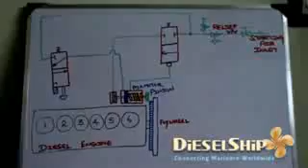So this is a simple air starting circuit for a 4-stroke engine, or either a small engine which is having air motor for starting. So let's now understand the basic simple circuit.

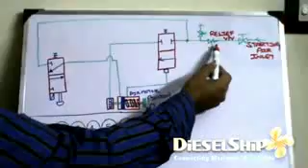Here we have the starting air inlet, usually 30 bar from the air bottle, and depending on the size of the engine we have a pressure reducing valve. This is just optional, so this valve depends on the engine size, may be there, may not be there.

For bigger engines, if you want to start with air motor, 30 bar is required. If it's a small engine, 30 bar is not required. So this pressure regulating valve may be adjusted for 20 bar, so it reduces the pressure and then gives to the starting circuit.

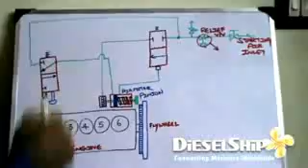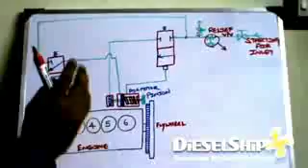And after that we have a safety mechanism, that is a relief valve, which means if something happens in this air starting circuit, the relief valve will lift and the air will be vented out to the safe area. So all this location and the purpose depends on the ship design and the starting requirement of the engine, but the basic system resembles this one.

So this is the simple diesel engine. Let's say it might have 5 units or 6 units. I assume it to be a 6-unit engine with a flywheel, and as we all know, the flywheel has the gear tooth over here. The bigger engines which we normally use on board ocean going vessel has teeth like this which engage with the turning gear and thus turn the flywheel.

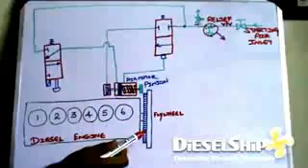Similar arrangement is there so that the air starting motor, this is the one, has a pinion which is a gear tooth, engages and then turns the engine. As it turns, the RPM, the speed of the engine, raises enough so that the combustion can take place. Till then, the air motor will rotate the flywheel with the help of compressed air.

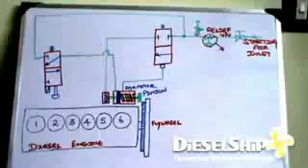So let's now understand the circuit. The 30 bar air, or the required air pressure after the reducing valve, comes over here and stops and waits at this control valve. So this is a pneumatic operated, spring loaded,

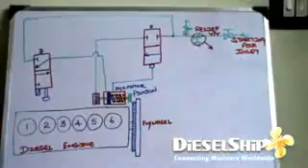2-position and 2-way control valve, and a part of air branches out and then goes to a control valve which is having 2-way starting mechanism. Either it can be a push button over here which is useful for manual start, and a remote signal can be given from the control room, thus this valve will operate.

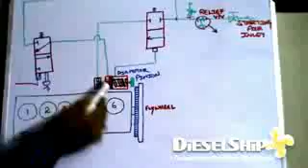So after the valve, the main line goes to the air motor which has a piston here. The piston is spring loaded, and as the air pushes the piston down, the pinion moves down and engages with the flywheel. And as the piston goes here, the air passes through.

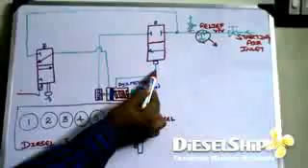This port is uncovered. This port has an access to here, and the air passes like this and then activates this pneumatic valve, the control valve. So this comes in this place, thus allowing the air, and then here are the vanes.

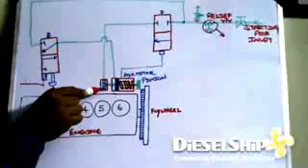This is similar to a vane or a turbine which has various flaps, and then as the air comes and hits it, it starts to turn. Thus the pinion is engaged with the help of the piston, and with the help of the vanes and air pressure, the engine is turned.

And as the engine picks up speed and starts combustion, let's say at 30 or 40 RPM depending on the engine design, let's say it fires on fuel now. A signal from the governor or from the control system, depending on the design, comes and deactivates the solenoid valve.

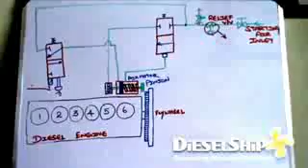Once it gets deactivated, again the valve gets shifted, the air behind the piston gets drained. So the piston, due to the spring force, retracts, thus the pinion is withdrawn from the flywheel and the air access is shut off, which means the air to the vane or the air motor is cut off in this place.

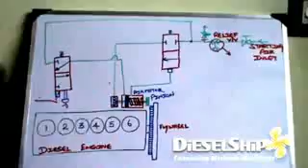Now this is the engine in let's say idle position. The engine is not started now. The other diagram which I'm going to show will be a working diagram, that will be a working circuit. Let's see how it is.

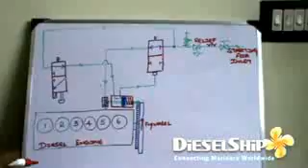So this circuit over here represents the air motor when it's working. So as I said earlier, the 30 bar air comes over here, and I start the engine manually by pressing this lever, and the 30 bar air which is available waiting over here, as the valve gets shifted, it passes through the control valve and then it passes through.

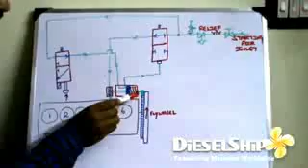Thus immediately it pushes the piston down. Thus the pinion engages with the flywheel, and as it pushes, it passes out and then operates this control valve pneumatically. So the compressed air operates this control valve.

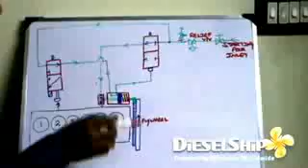Thus the main air which is waiting here, the valve shifts and then it passes through, rotates the vane and gets vented through a small hole, and as it rotates, the pinion rotates, thus the flywheel turns and then the engine picks up speed, and as the engine picks up the firing speed, I see the tachometer on the engine panel.

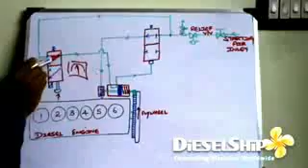As it picks up speed, I release the lever. So once I release it, immediately due to the spring force, the valve shifted and the line gets vented. This line, the air behind the piston gets vented, which means the piston due to the spring force will come back to its original position.

Thus the pinion is disengaged, and this control valve, since there is no air supply, shifts back, stopping the air, and no more air supply for the vanes. So the air motor stops working at this time.

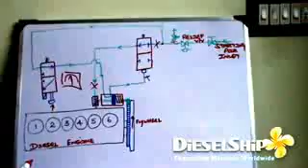Thus the engine is started and then it picks up on fuel. This is the basic circuit, and in the future videos we'll be seeing about the air motor and its construction and other mechanisms or means of starting, let's say like hydraulic starting of emergency generators.